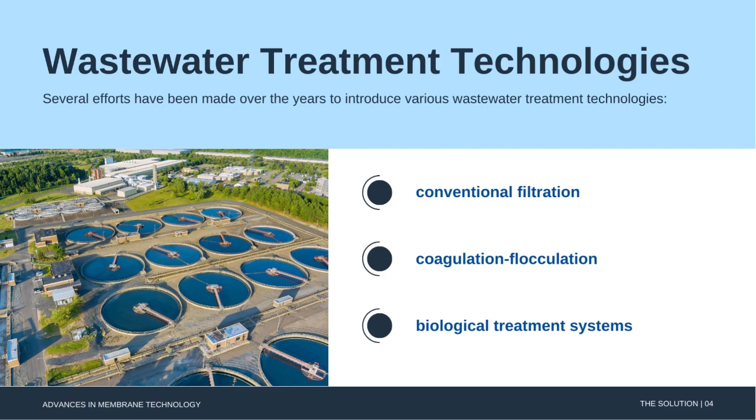In this vein, several efforts have been made over the years to introduce various wastewater treatment technologies, such as conventional filtration, coagulation flocculation, and biological treatment systems, among others. There is also improvement of already existing technologies to meet current discharge or reuse standards.

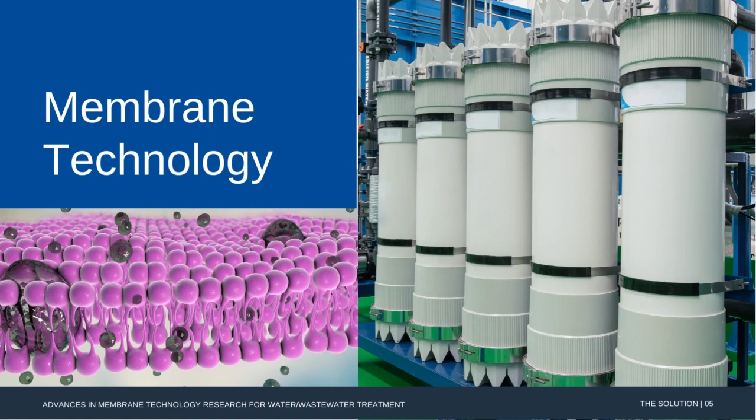One of the wastewater treatment technologies that have seen a major boost over this period is membrane technology. Membrane technology has grown significantly in the last couple of decades due to the benefits it offers in water and wastewater treatment.

Basically, a membrane is a barrier which separates two phases from each other by restricting movement of components through it in a selective style. Membranes have been in existence since the 18th century. Since then, a lot of improvements have taken place to make membranes better suited for many different applications.

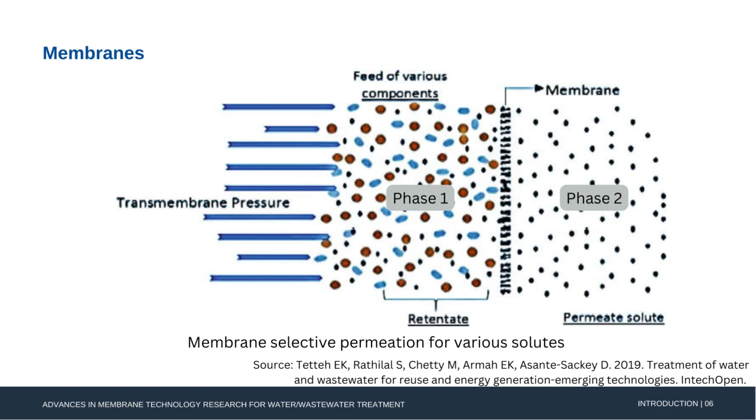Because of its multidisciplinary application, this technique is applied in several industries, including water treatment for domestic and industrial water supply, chemical, pharmaceutical, biotechnological, beverages, food, metallurgy, and various separation processes.

Moreover, the drawbacks associated with membrane technology include two major phenomena, that is, membrane fouling and membrane modules, which we will be dealing with briefly in the latter part of the presentation.

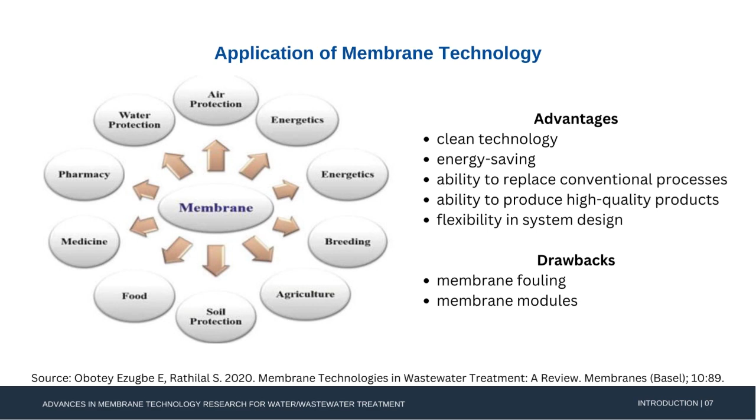Characteristically, membranes can be classified as isotropic and anisotropic. Isotropic membranes are uniform in composition and physical structure. They can be microporous, in which case their permeation fluxes are relatively high compared to when they are non-porous or dense, where their application is highly limited due to low permeation fluxes. Isotropic microporous membranes are widely applied in microfiltration membranes.

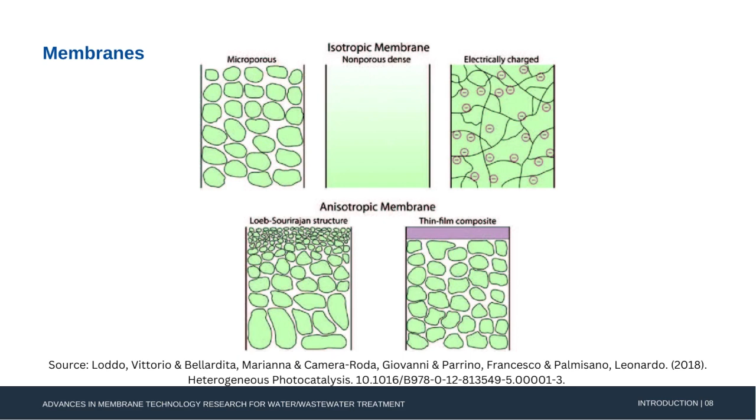Anisotropic membranes, on the other hand, are non uniform over the membrane area and are made up of different layers with different structures and composition. These membranes have a thin selective layer supported by a thicker and highly permeable layer. They are particularly applied in reverse osmosis processes.

In terms of membrane material makeup, membranes are classified as either organic or inorganic. Organic membranes are made from synthetic organic polymers. Mostly, membranes for pressure driven separation processes such as microfiltration, ultrafiltration, nanofiltration, and reverse osmosis are made from synthetic organic polymers.

These include polyethylene, polypropylene, and cellulose acetate, among others. Inorganic membranes are made from such materials as ceramics, metals, zeolites, or silica. They are chemically and thermally stable and used widely in industrial applications like hydrogen separation, ultrafiltration, and microfiltration.

Now, let's start with pressure driven membrane processes. These are by far the most widely applied membrane processes in wastewater treatment, from pretreatment to post-treatment of wastewater. These processes rely on hydraulic pressure to achieve separation.

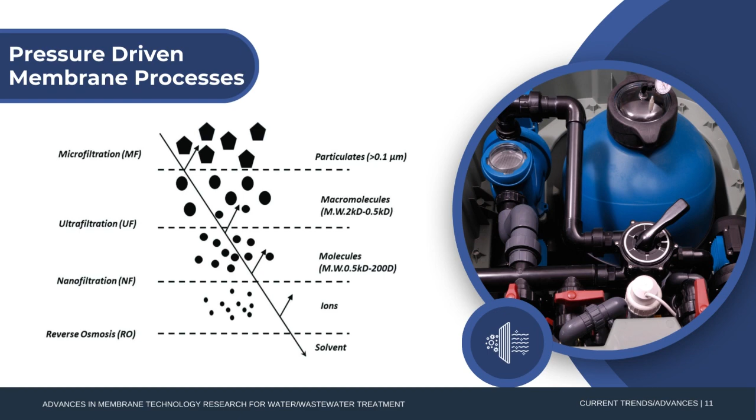There are four main types of these processes: microfiltration, ultrafiltration, nanofiltration, and reverse osmosis. The main difference exhibited by these processes, apart from their pressure requirements, is their membrane pore sizes. The table on the next slide provides a summary of the main features of these processes.

Among the pressure driven membrane processes, reverse osmosis is highly known for its efficiency in separating small particles, including bacteria and monovalent ions like sodium ions and chloride ions, up to 99.5%.

Reverse osmosis has been at the forefront of water reclamation through wastewater treatment and desalination of seawater for a long time. During reverse osmosis, a hydrostatic pressure is generated that is strong enough to overcome the intrinsic osmotic pressure of the feed. This is against the natural osmosis process.

For the complete process, the water molecules are absorbed into the membrane surface under pressure. These molecules diffuse through the membrane material and finally desorb at the permeate side of the membrane for collection.

Different combinations of these pressure driven membrane processes have been applied in different wastewater treatment settings. In some cases, they serve as pretreatment to other unit processes.

In an experiment, Nataraj et al. combined nanofiltration and reverse osmosis to treat distillery wastewater, in which an average of 98% of contaminants—color, total dissolved solids, chemical oxygen demand, and potassium—were removed successfully.

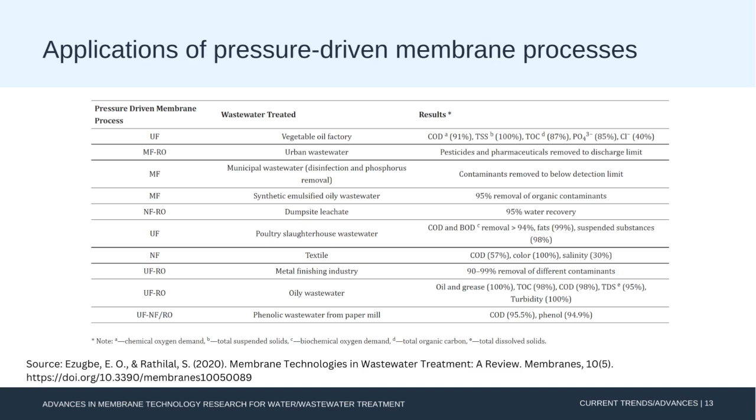This gradient provides the needed osmotic pressure difference to drive water molecules from the feed solution to the draw solution. This movement continues till an equilibrium of chemical potential is reached, unless for niche applications where the water being drawn from the feed forms part of the product—there is always the need for a recovery unit. This unit simultaneously recovers fresh water and regenerates the draw solution.

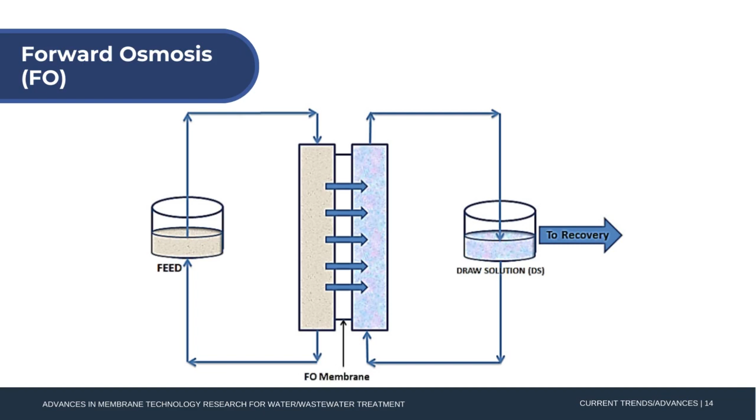Forward osmosis has been applied for the treatment and concentration of different streams of wastewater. Holloway and others applied forward osmosis in concentrating anaerobic digester concentrate, in which a reverse osmotic system was used to recover and reconstitute the draw solution.

Similarly, York and others applied forward osmosis in landfill leachate management using sodium chloride as a draw solute and reverse osmosis to recover and reconstitute the draw solution. Up to 95% of the permeate was recovered.

In other applications, Zhang et al. combined forward osmosis and membrane distillation to recover water from oily wastewater.

Haupt and Lerch conducted a series of forward osmosis experiments to investigate the applicability of forward osmosis in an automobile production site and dairy industry.

It was found that cathodic dip painting rinsing water and paint shop pretreatment wastewater proved well as feed solution when 1 mole per liter of sodium chloride was used as draw solution, and can therefore be utilized in an automobile production site for wastewater treatment.

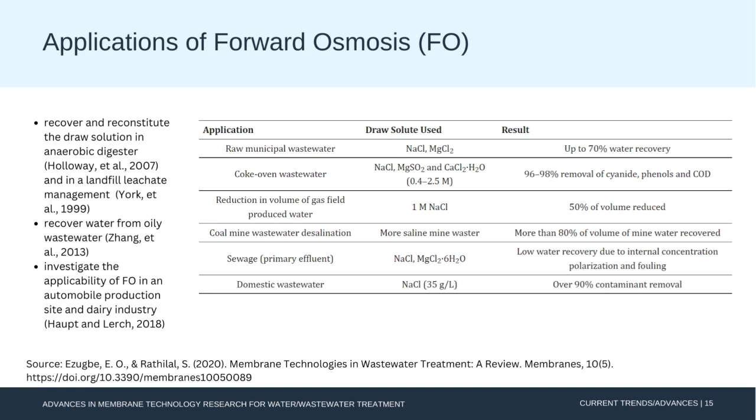In the write up on forward osmosis for sustainable water treatment, Shen et al. noted that the method for freshwater recovery after forward osmosis is greatly dependent on the kind of draw solute used. Where monovalent ions such as sodium and chloride form part of this draw solution, reverse osmosis is mostly employed for the recovery, whereas multivalent ions, hydrophilic nanoparticles, micelles, and polyelectrolytes would require membranes with larger pore sizes like ultrafiltration and nanofiltration. Forward osmosis has several advantages.

The process does not require external pressure, especially for niche applications of forward osmosis, which makes energy consumption lower compared to pressure driven processes. Fouling reversal and water cleaning is also easier due to the use of osmotic pressure for separation.

Flexibility in choosing draw solution makes it easy to customize products either for freshwater recovery or for other purposes like pharmaceuticals and beverage production, in which case properties of products are maintained since no pressure or heat is applied. Furthermore, the regeneration and reuse of draw solution is advantageous in saving cost.

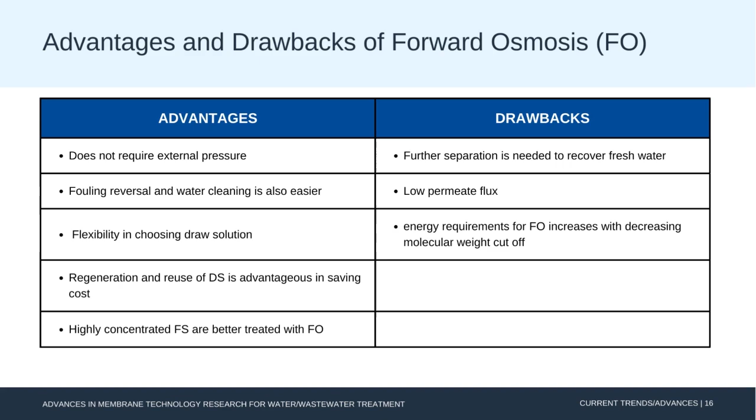Again, energy requirements for forward osmosis increase with decreasing molecular weight cutoff. This is because the regeneration of the draw solutes would require membranes with smaller pores and more pressure like reverse osmosis. This, in effect, increases the overall energy requirements.

Electrodialysis and electrodialysis reversal are processes that combine electricity and ion permeable membranes to separate dissolved ions from water. These processes make use of an electric potential to transfer the ions from a dilute solution to a concentrated solution through an ion permeable membrane.

There are also two streams of solutions, the concentrate and the diluate or the feed. When electric current is passed through the system, ions from the diluate migrate into the concentrate through oppositely charged membranes. The cations migrate to the cathodes, while anions migrate to the anodes.

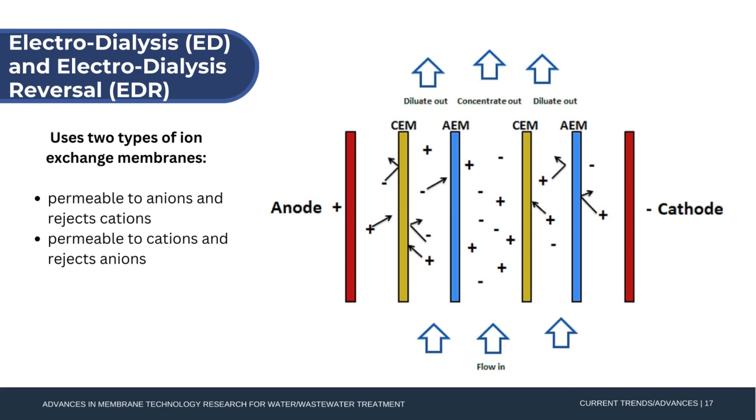The cations are then retained by the positively charged ion exchange membrane. Likewise, the anions are retained by the cation exchange membrane. The outcome of this is a feed stream depleted of ions while the concentrate stream becomes rich in ions.

The electrodialysis reversal involves the periodic reversal of the electrodes of the membrane, and hence reversing the movement of ions. This causes concentrated streams to be diluted and diluted streams to be concentrated, hence reducing fouling of the membrane.

Electrodialysis and electrodialysis reversal have been applied in many ways in wastewater treatment. The table shows some common applications.

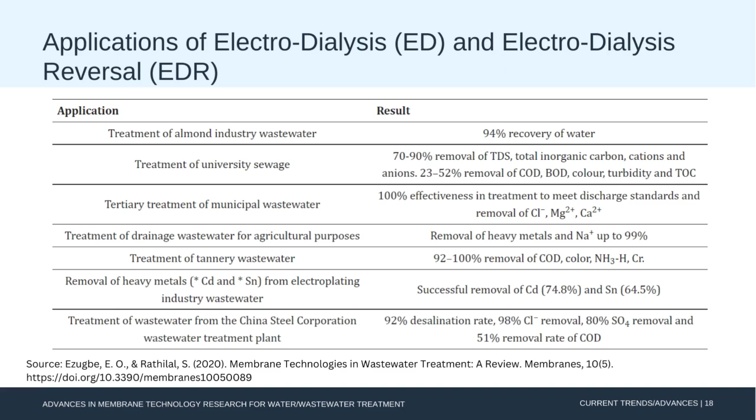Electrodialysis and electrodialysis reversal are very useful in wastewater treatment mainly to remove total dissolved solids and other ionized constituent particles. They have a very high water recovery rate and require little pretreatment for feed water. There is also less membrane fouling due to process reversal, and the technology can be combined with renewable energy sources.

However, electrodialysis is not suitable for wastewater streams with high salinities because desalination energy is proportional to the ions that are removed. This would then be very expensive to operate.

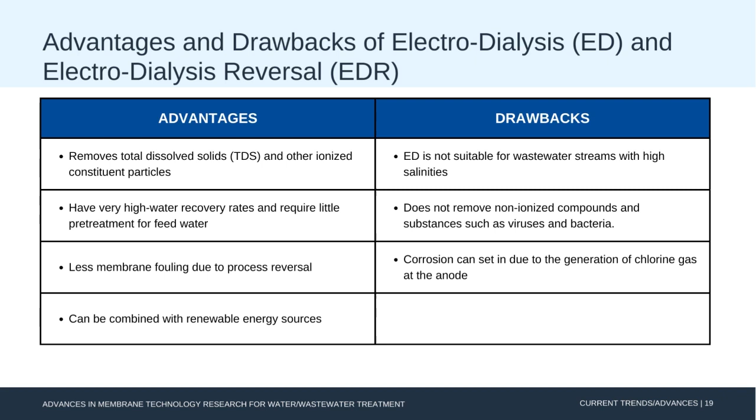The process also does not remove non-ionized compounds and substances such as viruses and bacteria, which are very harmful. This implies that a post treatment would be required, which would make the process expensive. Furthermore, due to the generation of chlorine gas at the anode, corrosion can set in.

During this process, sorption of the permeate in the upstream occurs. By this, the more permeable component of the liquid mixture is absorbed onto the membrane, either the non-porous polymeric membrane or the molecularly porous inorganic membrane.

These components then diffuse through the membrane under the influence of a concentration gradient of the diffusing species and subsequently evaporate at the downstream phase of the membrane. The vapor is then condensed and recovered as liquid. This mode of mass transport across the membrane is known as the solution diffusion model.

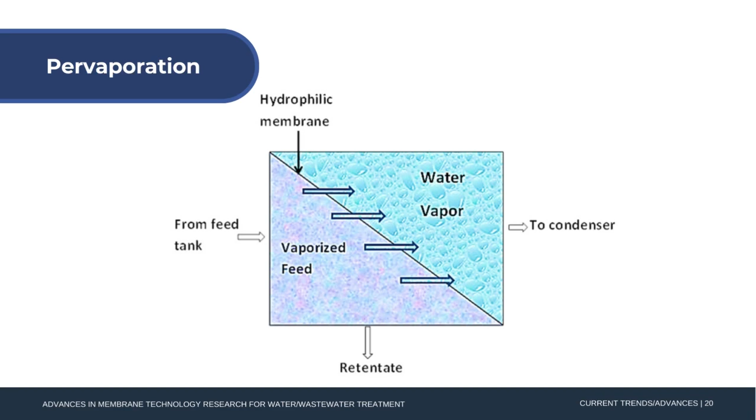This technology has been applied mainly in ethanol water separation. It is, however, being explored for wastewater treatment in many areas of production.

Edgar and others applied pervaporation in microirrigation of plants from wastewater. In the experiment, a dense hydrophilic pervaporation membrane was placed at vantage positions in the soil. Synthetic wastewater in a feed tank was circulated over the membranes where the permeate flux and enrichment of the wastewater were monitored. The results showed that this technology has prospects in the treatment of brackish groundwater or wastewater for microirrigation purposes.

In a pilot scale experiment to remove organic solvents such as benzene, toluene, naphtha, butane, ethyl ether, etc. from dilute aqueous streams, Wijmans and others used organophilic membranes to remove and concentrate these solvents from the aqueous stream. It was observed that it was possible to concentrate the organic solvents at least 50 to 100 fold, thereby making available a cleaner stream of wastewater for reuse or discharge.

In a similar work, Kondo and Sato used a polyether blockamide membrane, which is aromatic hydrocarbon selective, to remove phenol from industrial wastewater discharged from a phenolic resin process. The wastewater contained up to 10% phenol and other contaminants. After experiments, the phenol concentrations detected were below 300 milligrams per liter.

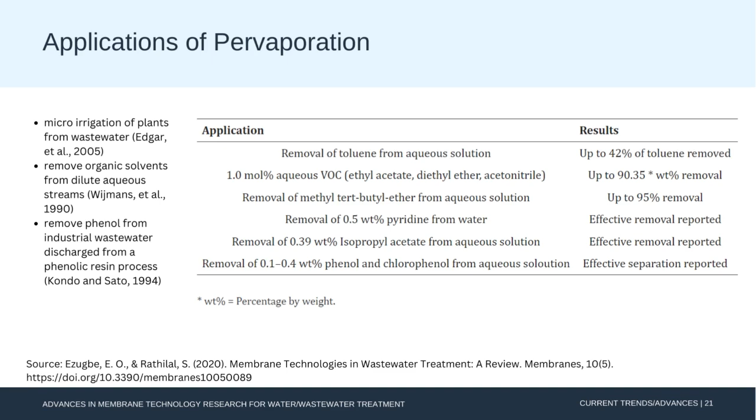Due to the specialty in application, pervaporation membranes are specially designed to have higher affinity for the component to be separated. This implies that the chemical nature and structure of the membrane plays a significant role in achieving the intended separation. Other factors that affect the processes of pervaporation include the feed concentration, partial pressure, temperature, and feed flow rate.

In addition to its ability to separate liquid mixtures, where conventional separation processes are limited, pervaporation is known to be an energy saving and eco friendly technology.

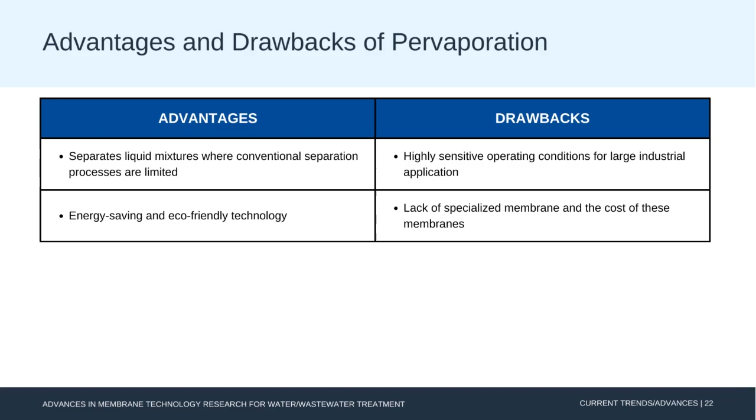There are, however, some drawbacks with this technology. Large industrial application is still not reached due to its highly sensitive operating conditions. Again, the application of pervaporation beyond dehydration is on the low side due to a lack of specialized membranes and the cost of these membranes.

Now let's talk about hybrid membrane processes. Hybrid membrane processes refer to the combination of one or more membrane techniques with other unit processes like coagulation, ion exchange, adsorption, or other membrane processes to give a better performance than either of the technologies as a standalone process.

Each component within the hybrid process tends to complement the drawbacks of the other, thereby enhancing the production of more quality treated water.

With an increase in stringent discharge standards and the radical search for alternative sources of water, more hybrid membrane processes are being explored. Also, due to the high risk of fouling membranes, other unit processes such as coagulation, flocculation, sedimentation, and other membrane processes are introduced as pre-treatment steps to reduce fouling of the membranes.

The main focus for hybrid membrane processes is to produce water for drinking or with different degrees of quality for other applications like irrigation, janitorial services, or to use as cooling water in industrial processes.

In a series of applications, low pressure membrane processes such as microfiltration and ultrafiltration were combined with activated carbon in the treatment of contaminated groundwater for drinking. The combination was able to remove particulate matter and protozoa, including Giardia, pathogenic bacteria, Cryptosporidium, and dissolved organic matter, making potable water available for use.

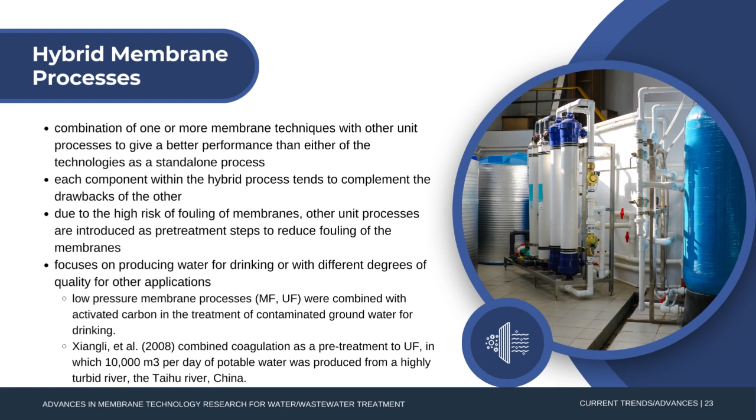In this setup, wastewater of relatively low salinity is used to dilute seawater to reduce the pressure required by reverse osmosis for desalination. In this process, the chemical potential of the seawater provides a concentration gradient which causes diffusion of water from the wastewater stream through a semi-permeable membrane into the seawater stream.

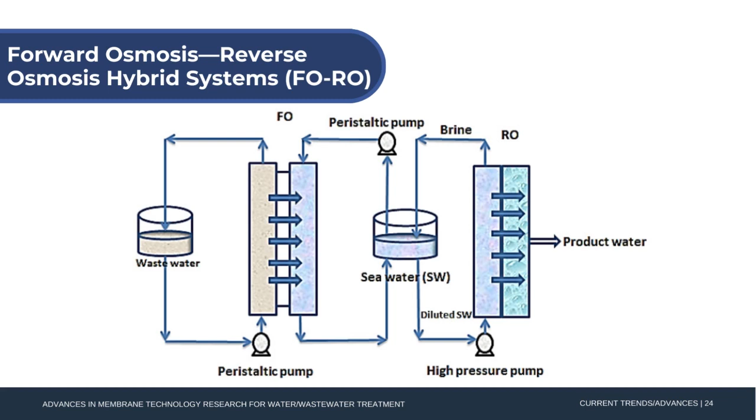The brine from the RO is recycled into the seawater feed tank to boost the concentration gradient. Consequently, the wastewater is treated simultaneously with the desalination of the seawater. This hybrid process has a huge advantage of low external energy requirements for solvent-solute separation and serves as a multi-barrier for contaminant removal. Membrane bioreactors.

Another interesting hybrid membrane process worth talking about is membrane bioreactors. This is a technology that combines biological processes like activated sludge and membrane processes like ultrafiltration, nanofiltration, microfiltration, and others for wastewater treatment purposes or for resource recovery from wastewater.

Over the past couple of decades, membrane bioreactors have surfaced as efficient water treatment techniques as they fill in the gaps left by conventional activated sludge processes, such as their inability to cope with fluctuations in effluent flow rates and composition, as well as their failure to meet higher effluent discharge limits for reuse purposes. The membrane bioreactors also save much space compared to conventional treatment systems.

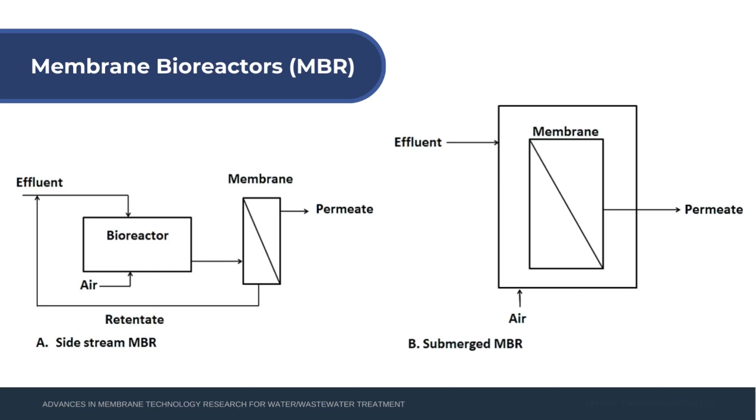Membrane distillation, or MD, is a growing membrane technology being explored. This hybrid membrane process is said to have existed for more than 50 years with little development for large scale or commercial use. Membrane distillation can be defined as the application of heat to separate substances based on their volatilities.

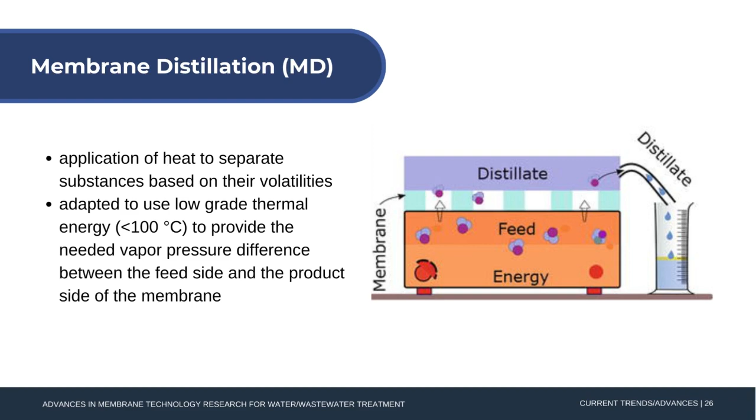In this technique, water vapor is transported across the hydrophobic microporous membrane based on a vapor pressure gradient across the membrane. This heat-driven process is mainly beneficial for separating feed solutions with high water content. MD is adapted to use low grade thermal energy, less than 100 degrees Celsius, to provide the needed vapor pressure difference between the feed side and the product side of the membrane.

For example, Alkhudhiri and others applied MD in the treatment of produced water from the Arabian Gulf, where they found membrane distillation very promising in terms of achieving high permeate flux and energy utilization.

Kiai et al. applied membrane distillation in the treatment of table olive wastewater high in phenols. Membranes of different pore sizes were used to evaluate the effects on permeate quality and phenol concentration.

In textile wastewater treatment, Calabro et al. studied the energy efficiency of membrane distillation system with respect to distillate flux, distillate purity, and temperature polarization. According to their results, the energy efficiency of MD can be improved by increasing the driving force on the membrane. They found MD as a potential treatment method for textile effluent and the recovery of quality water for reuse.

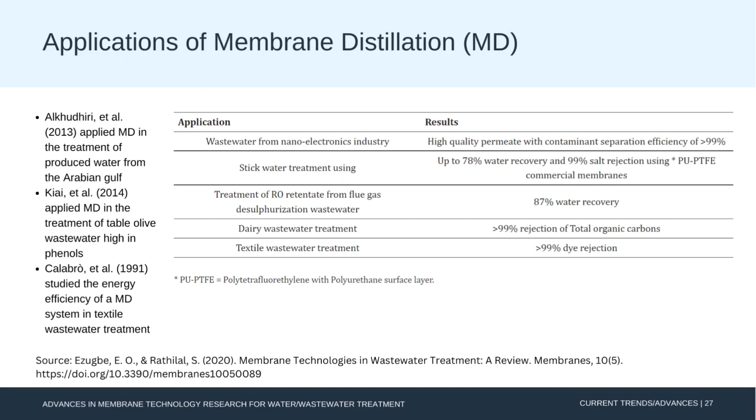The table here shows some other applications of membrane distillation in the treatment of wastewater.

Characteristically, membranes for membrane distillation should have low resistance to mass transfer to enable free flow of mass. To enhance heat maintenance in the system, the membrane material must have low thermal conductivity, and importantly, must also have low affinity for water to guard against unnecessary wetting. Pore sizes usually range from 0.1 micrometer to 1 micrometer.

Membrane distillation has many attractive prospects. It can be driven by renewable energy sources such as solar or wind, and waste heat recovered from industrial processes can also be used.

In terms of pressure requirements, MD uses low hydrostatic pressure compared to reverse osmosis. For example, MD can be performed at operating pressures near atmospheric pressure. Also, compared to pressure driven membrane processes, membrane fouling is less due to larger pore size requirements.

In terms of separating non-volatile materials from volatile ones, feed-product separation is 100%. Contaminant concentration has no influence on product quality. All this notwithstanding, MD has some drawbacks.

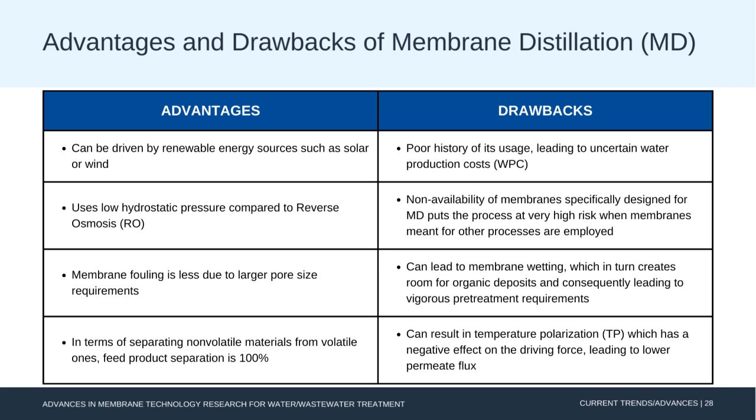Finally, since heat and mass transfer take place simultaneously, a fluid boundary layer is formed, leading to temperature polarization. TP is a phenomenon that occurs due to the difference in temperature between the bulk of the feed and the feed-membrane interface, where evaporation occurs, and the difference in temperature between the permeate-membrane interface, where condensation occurs, and the permeate itself. This temperature polarization negatively affects the driving force, leading to lower permeate flux.

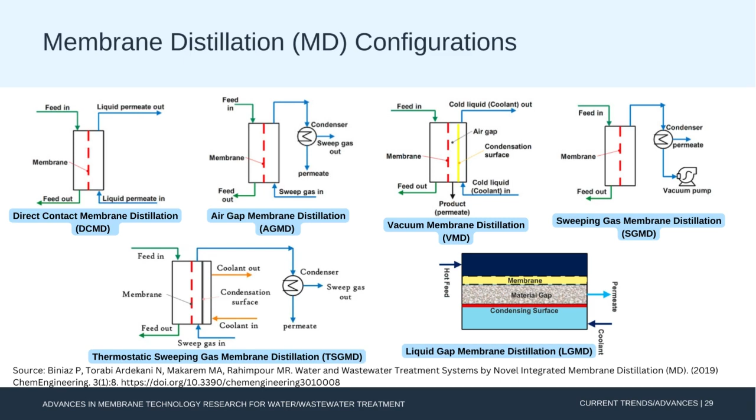To provide the needed driving force for membrane distillation, four main configurations are usually considered, as shown in the figure: direct contact membrane distillation, air gap membrane distillation, vacuum membrane distillation, and sweeping gas membrane distillation. However, recent developments have considered hybrid combinations such as thermostatic sweeping gas membrane distillation and liquid gap membrane distillation.

Membrane fouling relies on different aspects of the setup, that is, membrane characteristics, operating conditions, and feed or biomass properties. Several of these variables combine in one form or another to intensify membrane fouling.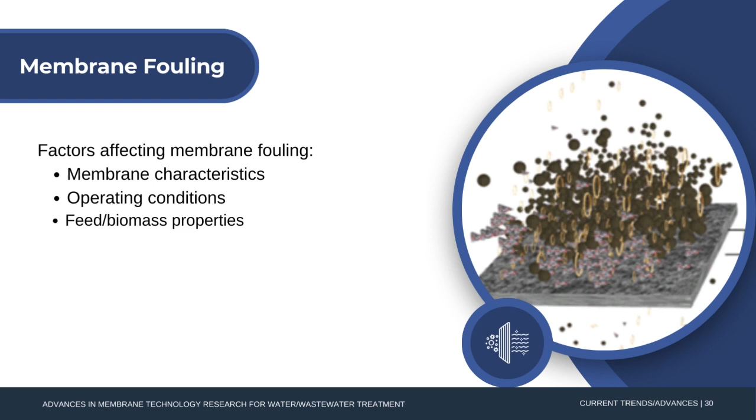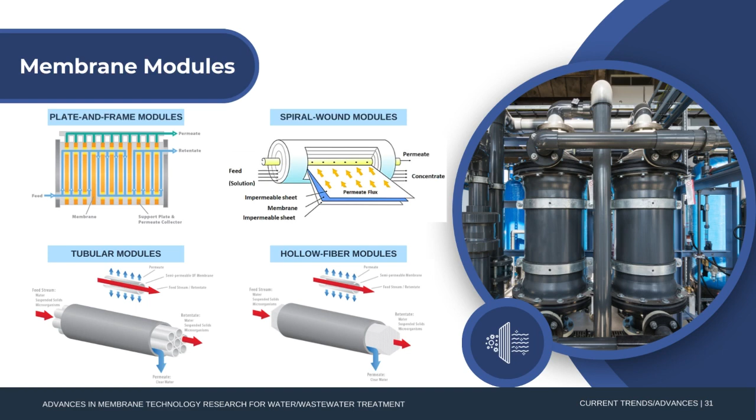Membrane modules: to achieve the required separation, industrial membrane plants require hundreds to thousands of square meters of membrane. There are many ways of economic membrane packaging to provide huge surface area for effective and efficient separation. Usually, the designs of membrane modules are used for prevention of membrane fouling. Commonly used membrane modules are plate and frame modules, tubular modules, spiral wound modules, and hollow fiber modules.

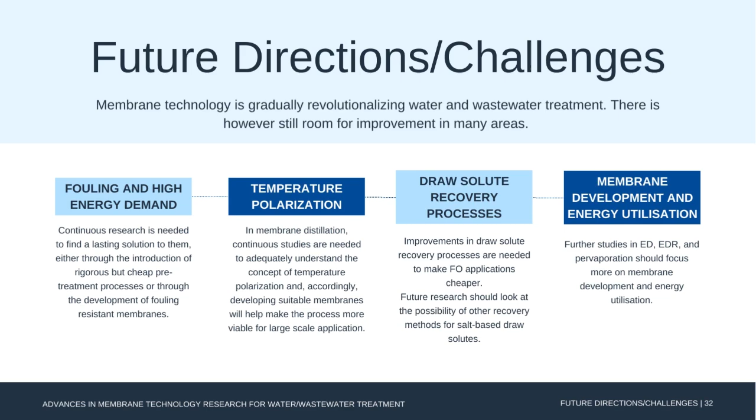Conclusion: overcoming the emerging global scarcity of water, energy, and other natural resources are grand challenges faced by humanity today. These critical resources are inextricably linked and therefore must be considered together as new technologies are developed. In essence, new effective methods to produce water at low energetic and environmental cost are essential.

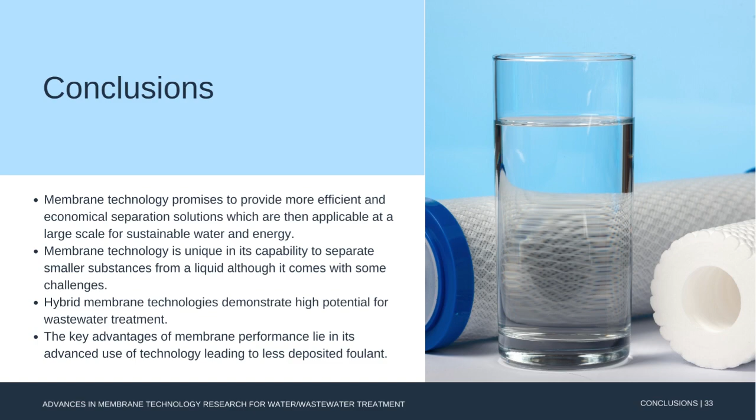Membrane technology promises to provide more efficient and economical separation solutions, applicable at large scale for sustainable water and energy. Membrane technology is unique in its capability to separate smaller substances from a liquid, although it comes with some challenges. Hybrid membrane technologies demonstrate high potential for water and wastewater treatment. Finally, the key advantages of membrane performance lie in its advanced use of technology, leading to less deposited foulant.